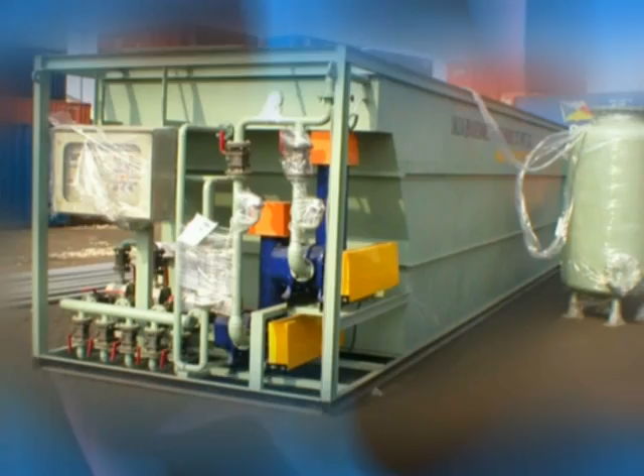Why treat wastewater? It's a matter of caring for our environment and for our own health. There are lots of good reasons why keeping our water clean is an important priority for our everyday use. Environmental Equipment Company Saudi Arabia, EEC, is one of the leading providers of wastewater treatment plants, using the most convenient way in advanced technology, the moving bed bioreactor, or MBBR, simply inimitable.

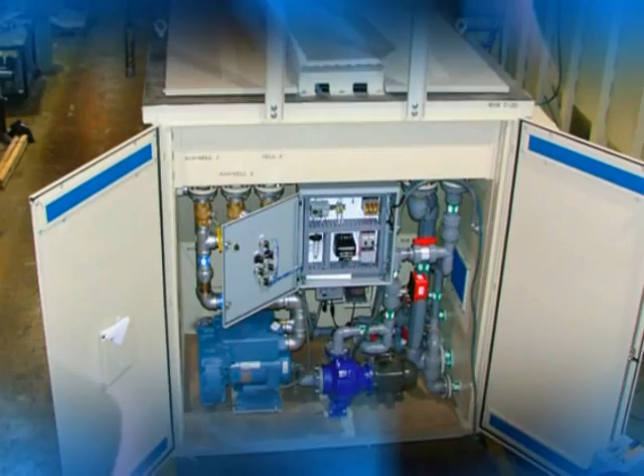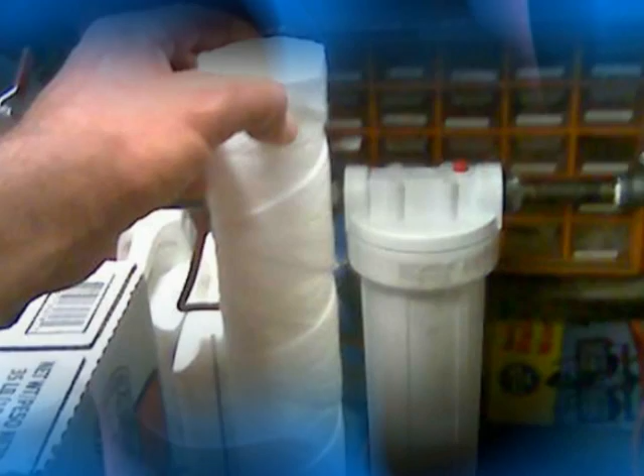There are many plants installed and satisfactorily operating on the MBBR principle. MBBR has the following advantages over other competing technologies. It facilitates reduction in the volume of the biological reactor, because it uses a support or carrier that gives a high specific surface. The processes are very flexible since they are based on the percentage of plastic support used in the reactor. It is recommended that it is not greater than 70%. The surface can be modified and, as a consequence, the efficiency of the process.

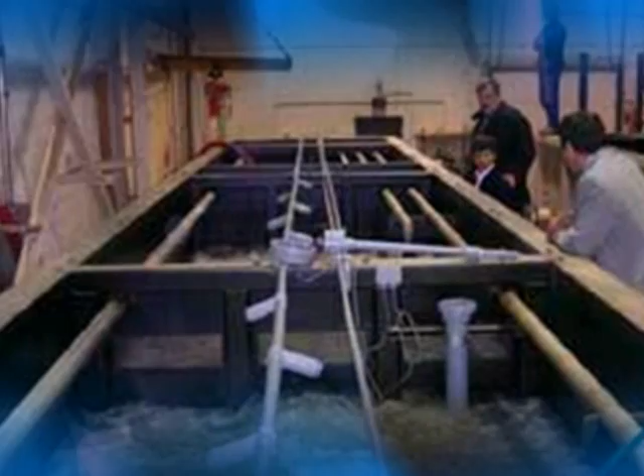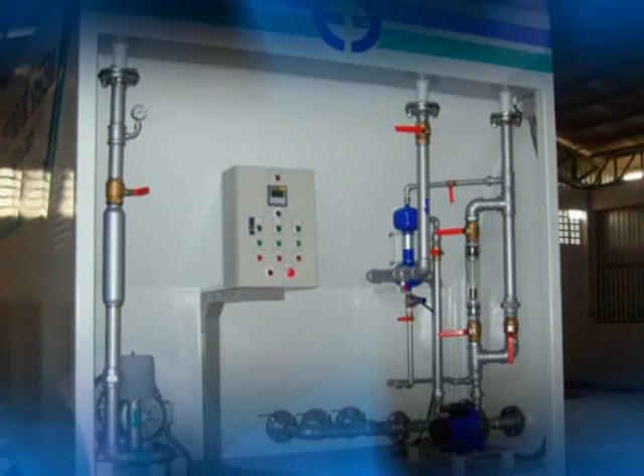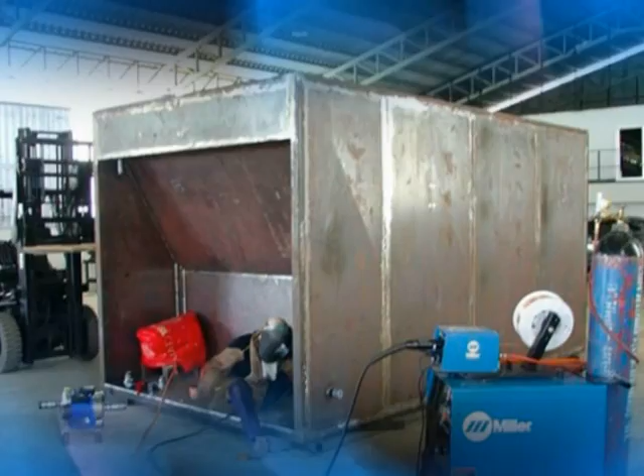In addition, it does not require reactor biomass recirculation. This gives rise to the fact that the biomass does not depend on the final separation of the sludge, and as a consequence avoids typical problems found in conventional activated sludge processes, related to the sedimentation properties of the sludge. The operation and control is trouble-free for this type of process. On one hand, the process avoids blockage problems and consequently regular cleaning periods. On the other hand, it is not necessary to control the sludge purging, since the system keeps the biomass in the reactor until it comes off the support.

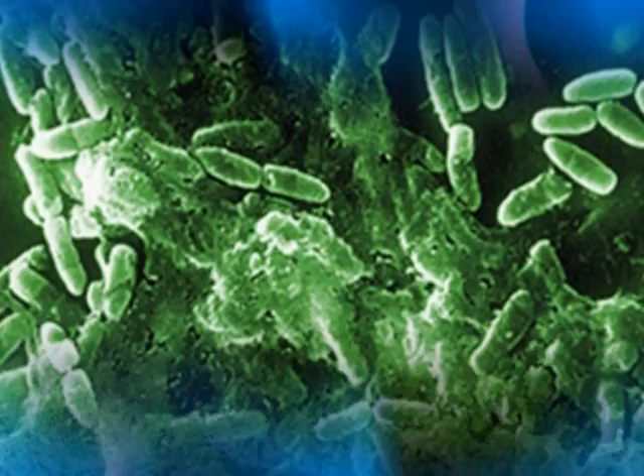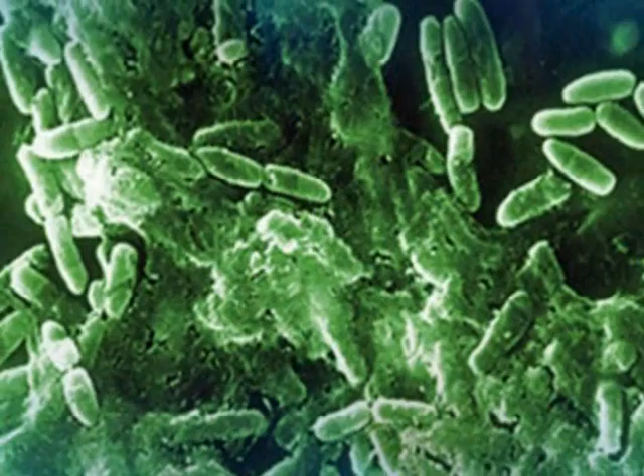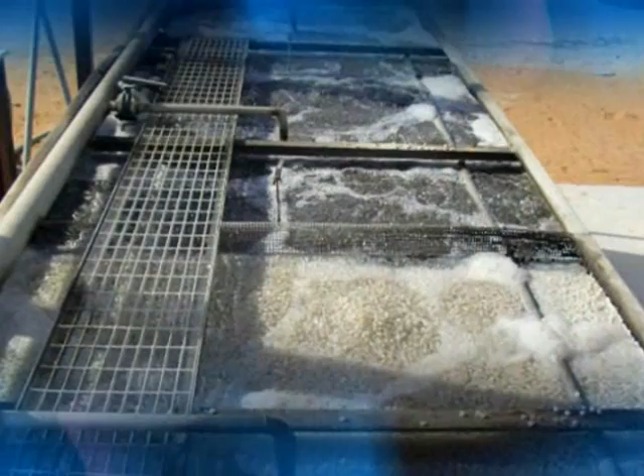Moreover, it allows the generation of a characteristic biomass for each type of reactor, aerobic, anoxic or anaerobic, bringing about the creation of a biofilm with a high level of activity. Experimentally, it has been confirmed that the levels of nitrification and denitrification in this type of process are greater than those obtained in conventional processes.

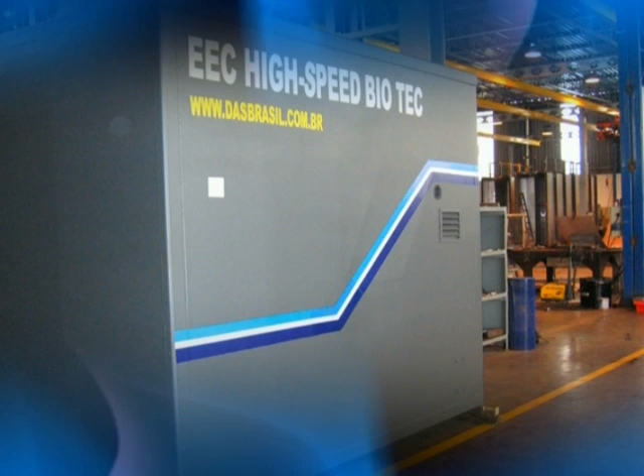The basic principle of the moving bed process is the growth of the biomass on plastic supports that move in the biological reactor via agitation generated by aeration systems or by mechanical systems. The supports are made from plastic with a density close to 1 gram per cubic centimeter, letting them move easily in the reactor even if it reaches 70% of the capacity. The moving bed processes come from the current trend in wastewater treatment toward the use of systems that offer an increased specific surface in the reactor for the growth of the biomass, achieving significant reductions in the biological reactor volume.

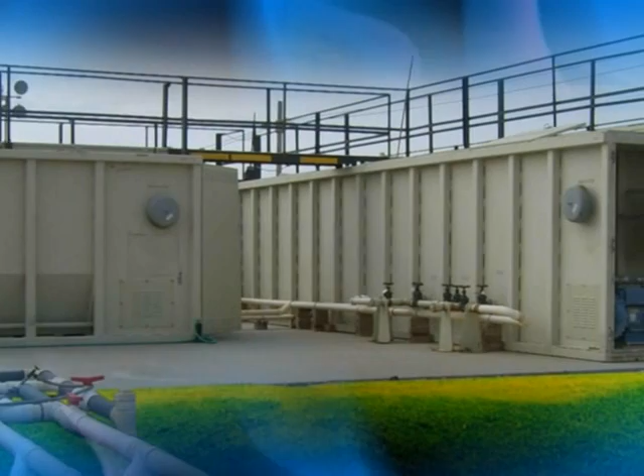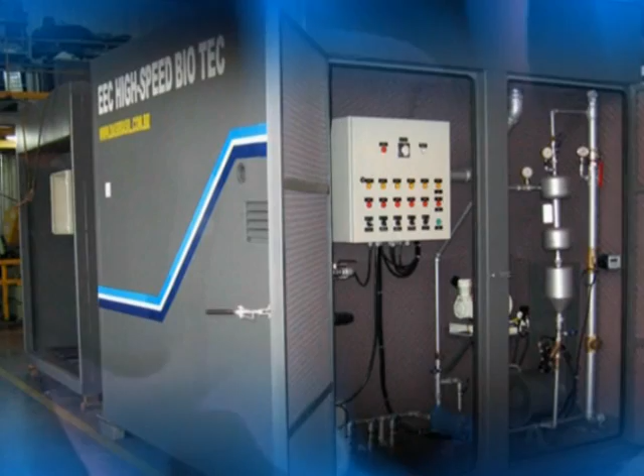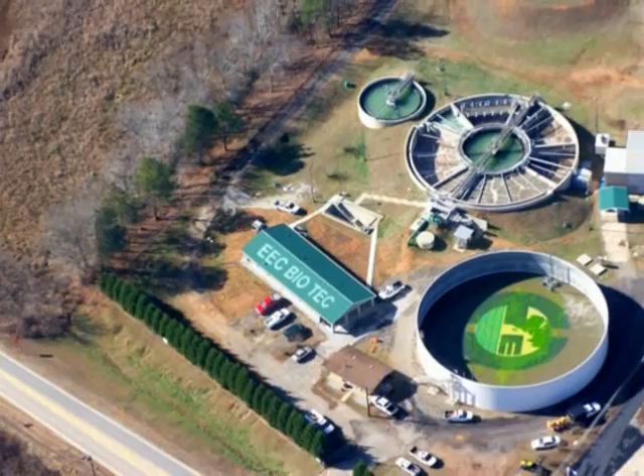Initially, fixed bed systems were used; however, it was discovered that this type of process shows a series of operational inconveniences, such as the blocking of the bed because of the excessive growth of the biomass. This makes periodical cleaning obligatory. These drawbacks have caused the need for the creation of simple biofilm processes that eliminate them and that ease their operation. These are the moving bed processes. This type of process can be applied both to treatment plants for the biodegradation of organic material, as well as for installations with nutrient elimination, in urban and industrial wastewater.

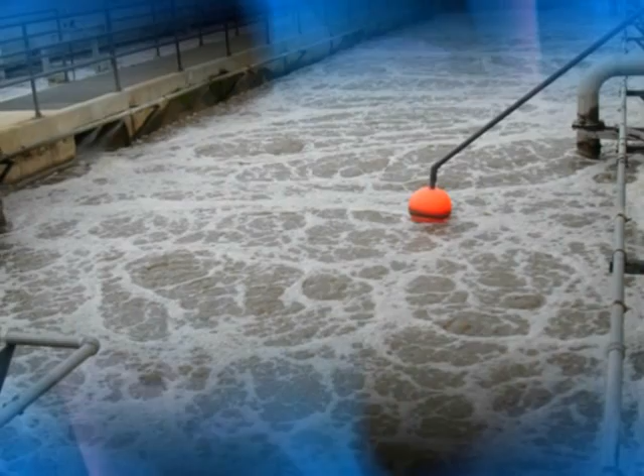Description of flow scheme.

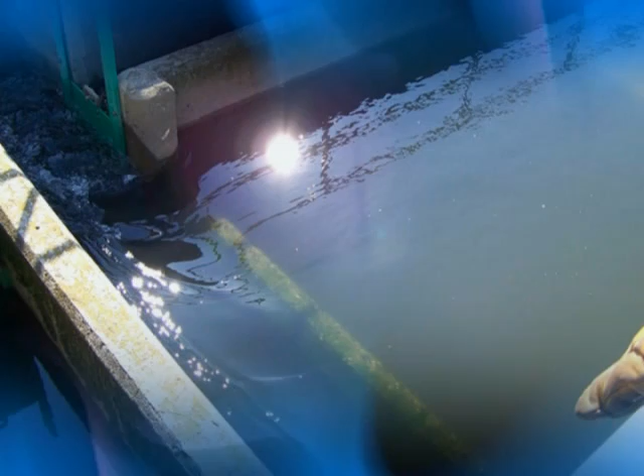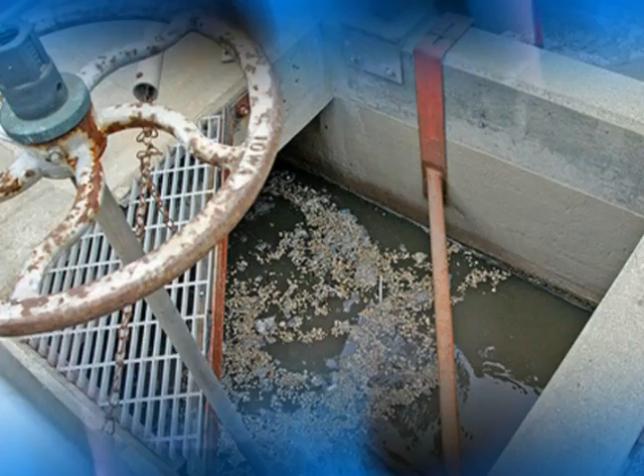Domestic wastewater flows by gravity to the 3-chamber buffer tank. Buffer tank is an underground tank provided by the end user either in concrete or FRP. In this tank, the heavier waste materials settle down by gravity, and lighter materials such as oil and grease float on the top. The floating objects are then trapped in the second chamber.

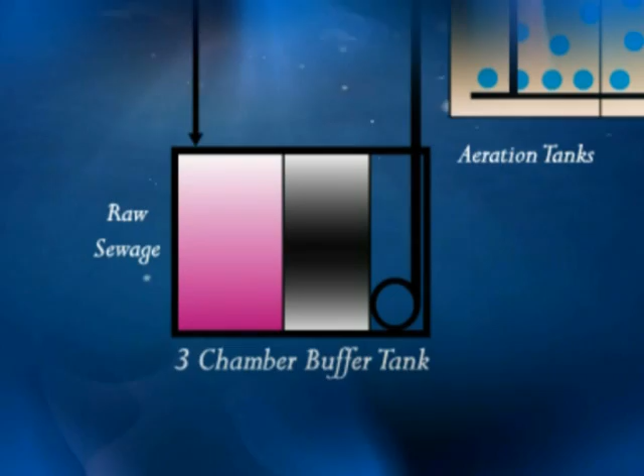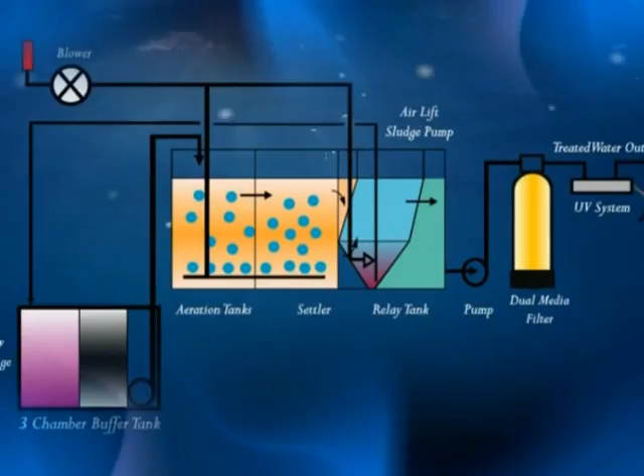The pre-clarified wastewater is then transferred to the MBBR1 through a sewage transfer pump. The AMB biomedia serves as growing area for aerobic microorganisms. Wastewater then flows to MBBR2 as a second stage polishing of organic material. The aeration is based on MBBR, which incorporates the latest technology for compact treatment systems. The system is based on biomedia, which is placed in the aeration tank.

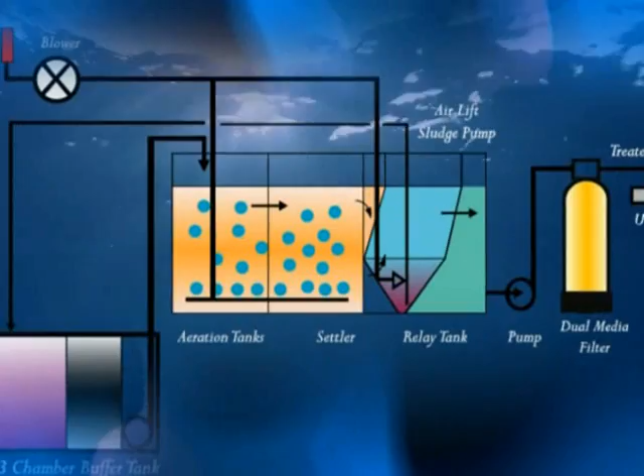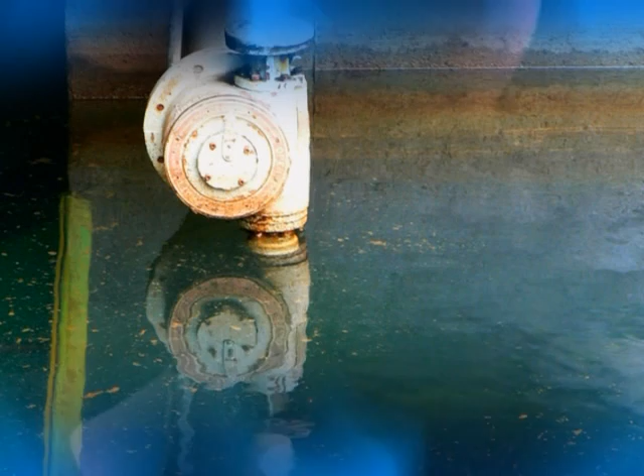In the aeration tank, the majority of pollutants are removed. This treatment phase utilizes microorganisms to remove the food and nutrients that are present in wastewater. As the wastewater enters this particular phase of treatment, the microorganisms are introduced. The aeration tank is agitated with diffused air that is fed by an air blower and dispersed in the tank

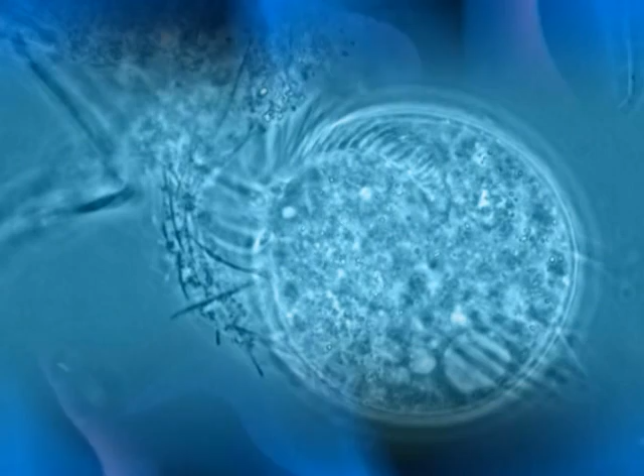with coarse air diffusers. Air maintains an aerobic environment in a mixed liquor of wastewater and activated sludge, which contains microorganisms. Upon contact, it will absorb organic matter from the wastewater and convert it to additional biological and respiration products of carbon dioxide and H2O. The activated sludge developed in the aeration tank is flocculent and settles. It readily separates from treated wastewater.

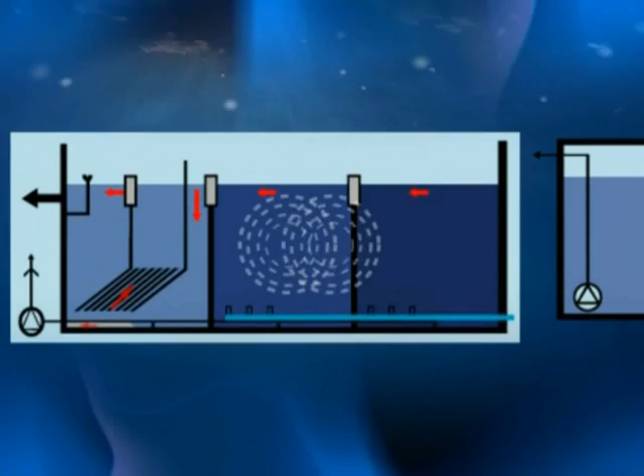After the aeration tank, the sewage is directed to the final settler. After the aeration stage, mixed liquor enters the final settler. Here, the velocity of the wastewater is slowed to allow the biomass to clump together and settle to the bottom while allowing the clear water to flow to the relay tank. The air lift sludge pump returns the settled sludge from the bottom of the settler to the first chamber of the buffer tank, where it is stored until ready for disposal.

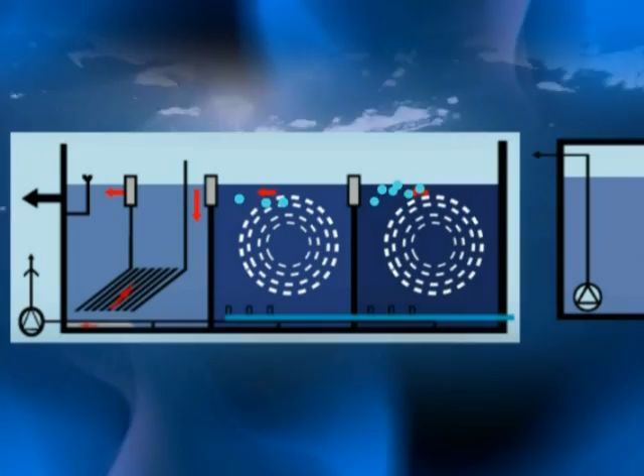The treated water from the relay tank is then pumped to a dual media filter for further removal of suspended solids, and finally treated by a UV filter. The UV filter kills the harmful microorganisms.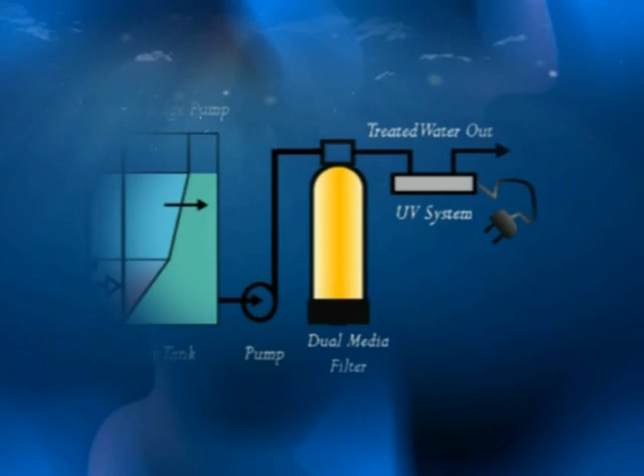MBBR technology. Containerized wastewater treatment plant, which handles 10 to 400 cubic meters per day in a single container. Quick startup. Fully automatic and mess-free. Meets any effluent requirements. Mobile or fixed units. Durable and accountable.

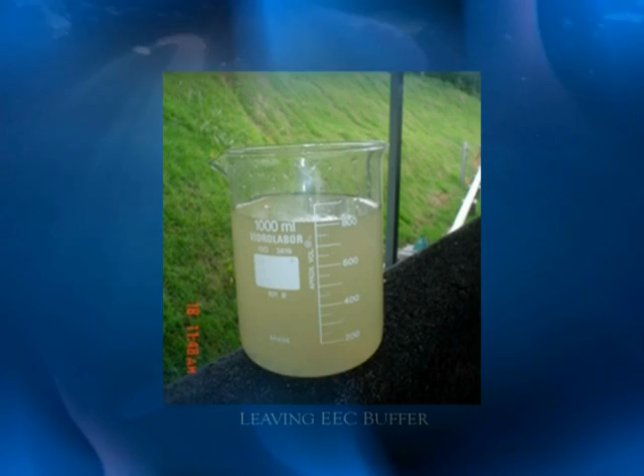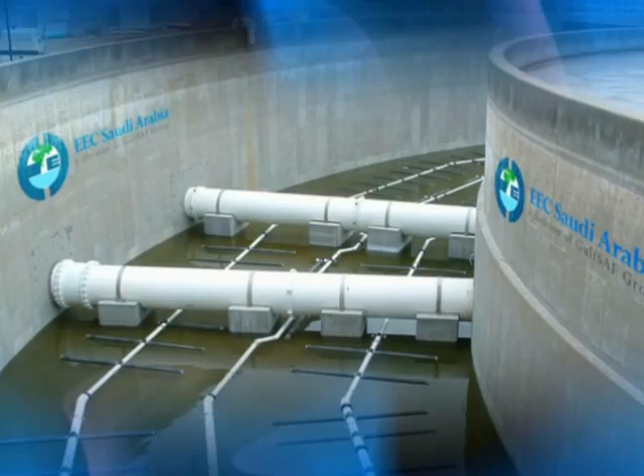A technological breakthrough using an advanced system of EEC biotechnology. Saudi Arabia. Flexibility. EEC technology is based on AMB biomedia. EEC bio is easy to transport, move, and expand. No additional shelters needed. Quick startup. Any capacity, any effluent requirements. Built or transported in standard ISO freight containers. No odor. Low power requirements.

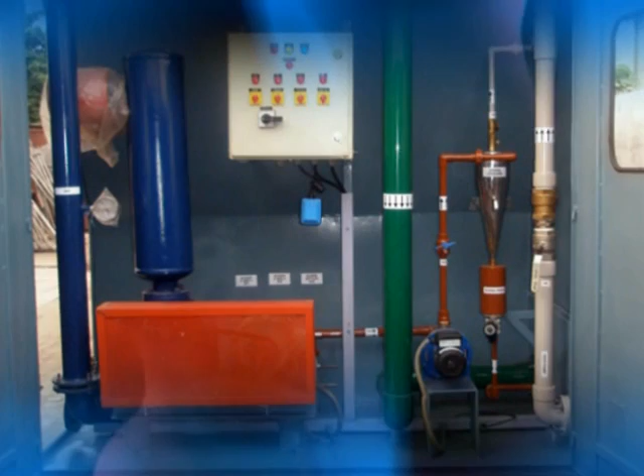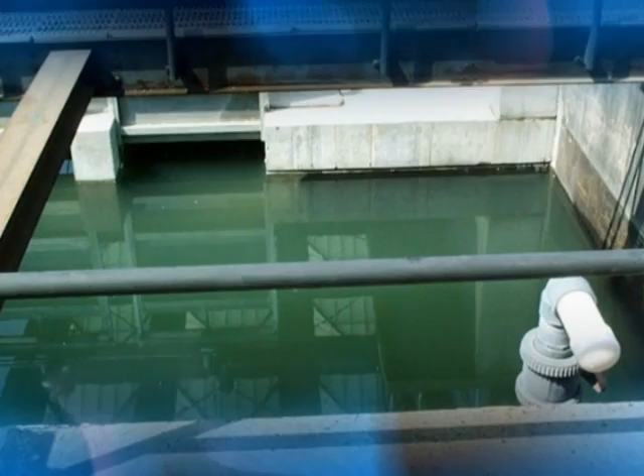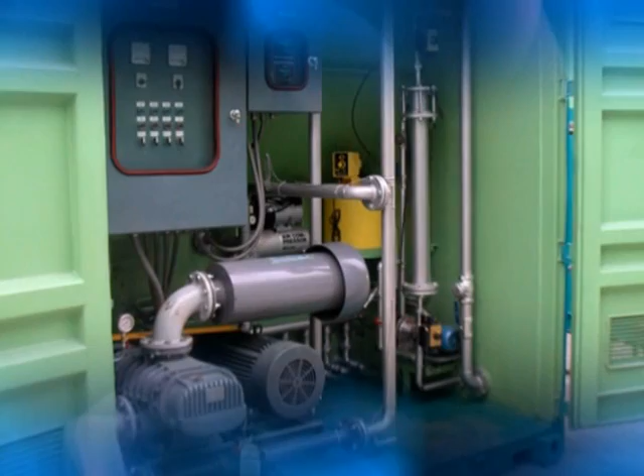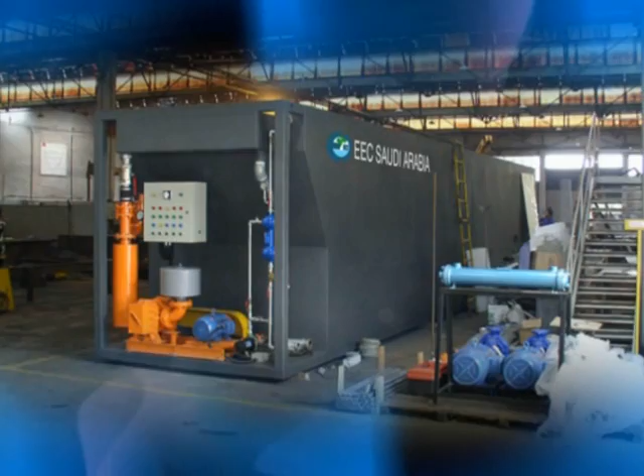Robust operation. Assisted moving bed offers 10 times the loading in 1/5 of the time. AMB biomedia equals 950 square meters per cubic meter of surface area inside the wastewater treatment plant. Clog-free operation and self-cleaning systems. Biofilm grows on the AMB media and offers sheltered and robust operation. No backwash required. Minimum service requirements equals mess-free operation. EEC package plants meet stringent effluent standards consistently. AMB biomedia is proprietary, designed by DAS USA, a sister company of EEC Global Operation.

Clients and applications. Domestic wastewater in general, up to 2,000 persons or 400 cubic meters in a 40-foot container maximum. Shopping centers. Camps. Military headquarters. Schools, universities, condominiums, housing projects, hospitals, remote locations, islands and resorts,

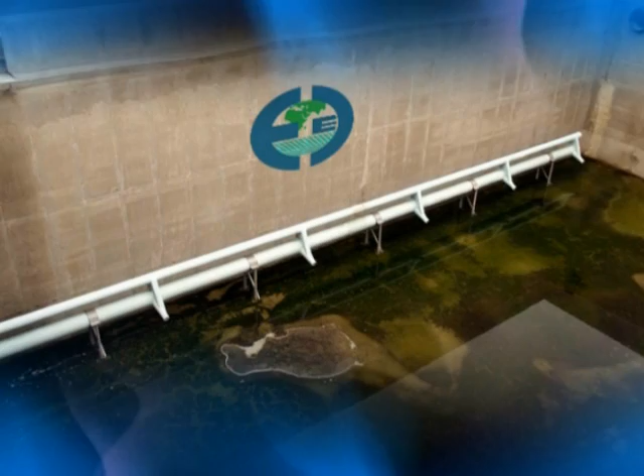industrial wastewater, oil rigs, airports, fast food chains, hotels, laundry shops, poultry farms, recreational centers, industrial factories.